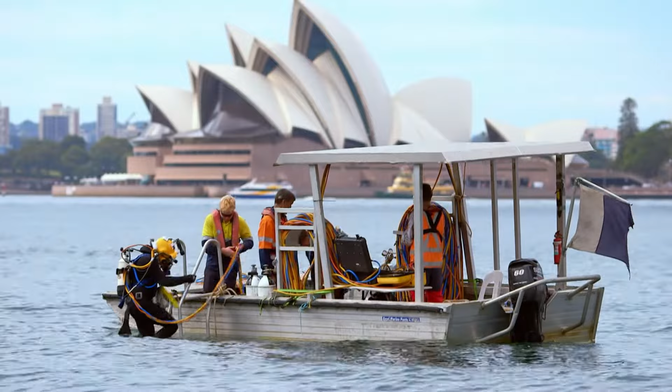No one has ever embarked on the scale of what we're doing here.

In Australia, engineers are taking on an extreme challenge: trying to clear suffocating traffic congestion by building an immense state-of-the-art metro through the heart of Sydney. We have to get there, there's no other way.

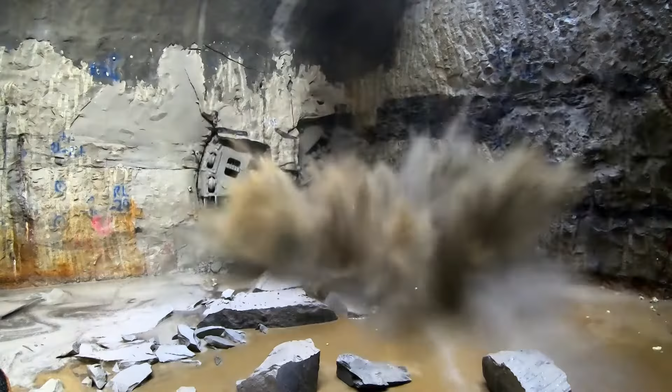The stakes are high. You've got to take every bit of luck you can get in this game. This is, by far and away, the biggest public transport project in Australia's history. If I'm honest, I probably didn't quite know what I was getting myself into.

Sydney, one of the most recognisable cities in the world. It's got the Opera House, the Harbour Bridge, Bondi Beach, and traffic. Endless traffic. But that's about to change. Now a crack team from around the world is tackling the problem head-on, battling to build a world-class metro without bringing the city to a standstill.

They've come from the UK. Mega projects gets thrown around like confetti, but what makes us different is just layers and layers and layers of mega. It should just fit together like a really nice Meccano project.

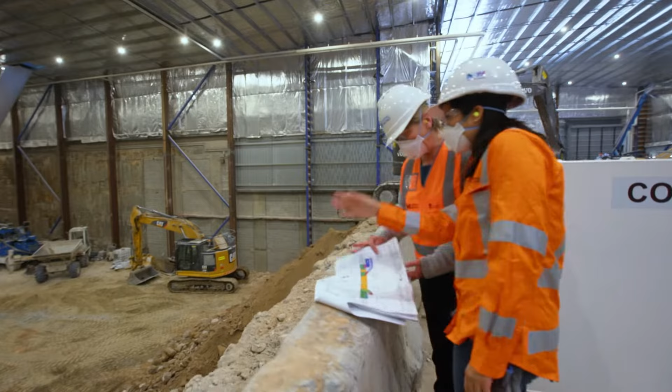From the US: I'm here to dig tunnels. I'm here to do stations, excavations, you name it. I love it.

From France: the design for Sydney Metro is unique, a very creative design, only for Sydney.

From Germany: when we are tunneling under Sydney Harbour, there are no second chances. And from Italy: it's the future of mobility for this city.

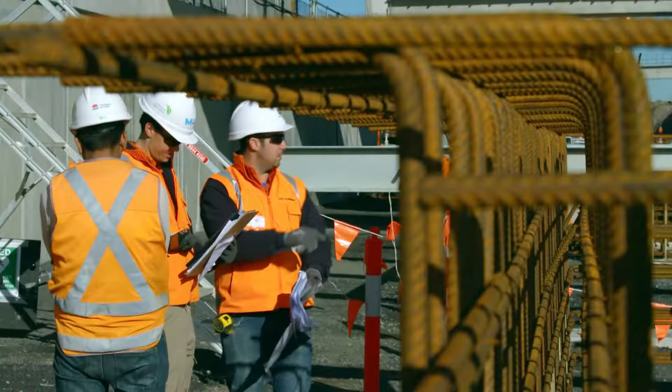40,000 people will build this metro, most of them Australian. It's definitely the biggest role and responsibility I've had. I'm loving it. I've personally developed and grown working on this project, and I think the whole team has. It is interesting—not very often you get to dig a big hole right in the middle of Sydney.

The hole James Pearce needs to dig is in the toughest location imaginable: right in the middle of Central Station, the busiest rail hub in the entire country. 99.5% of Sydney trains travel through this station every single day, so it's a huge undertaking.

We've got 4 pedestrian tunnels through the middle of the station box, and 3 of them we need to keep open at all times, 24 hours a day, 7 days a week, 365 days a year. The station doesn't shut down at all.

James has to remove more than 500,000 tonnes of earth—6,000 tonnes a week—without disturbing Central's almost 2 million weekly passengers. It's a highly complex task, but James is up for the challenge.

So here we are right in the middle. These platforms all need to go to let us dig 30 metres down into the ground and connect into the new tunnels, which will be the Metro trackway. So all these platforms, time to go. Pigeons out, we're coming in.

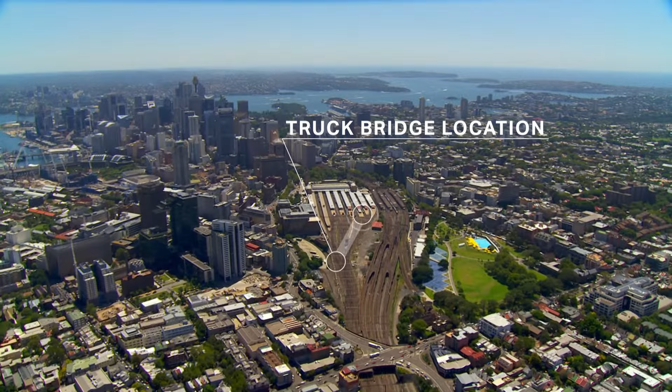His solution is simple: if you can't go around the passengers, go over them with a truck bridge. There's no access the whole way around Central Station, and there's 230,000 cubic metres of material to come out. Every single truck movement for the project will be in and out over that bridge.

One way in, one way out, right in front of the tower crane. The largest beam is 55 metres long.

James is only allowed to disrupt train services for 12 hours, so they're bringing in a prefabricated bridge—400 tonnes of it. That's fully sealed, so then you can drop the concrete in. It will be a race against time to crane in the gigantic steel spans.

Right next door, lines will remain active, with 1,500 deadly volts that must be avoided. Abutment B is extremely close to the live rail. James backs himself and his team to get the job done before the Monday peak arrives.

It's going to be a totally different scene on Monday morning. There's going to be a whole heap of steel across here, and the trains will travel under the bridge for the first time. Digging up the middle of Central Station is just one of the many enormous challenges that confronts the team.

From here, one line needs to run north through a minefield of subterranean obstacles deep under the city, under the harbour, and 50 kilometres out to the northwest. Running south from Central Station, another line will swing 20 kilometres out to the southwest. Next, another line will leave the city and travel 25 kilometres due west to Parramatta. Yet another metro line will then connect a new international airport with the rest of the city, and further still, more lines will create a virtual metro loop around Sydney.

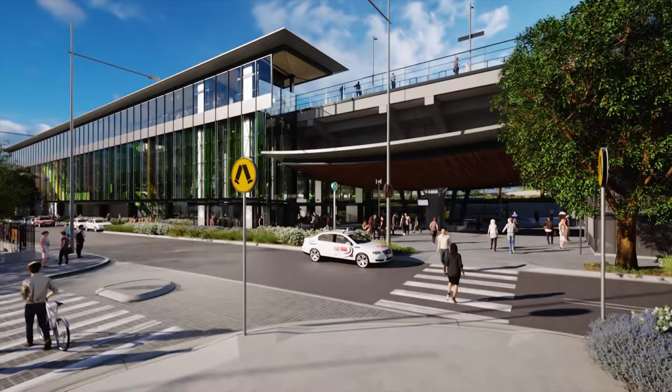More than 50 new or renovated stations need to be built, linked by the longest railway tunnels ever dug in Australia. This project is exceptionally ambitious, and it all needs to be constructed in just a few short years. At every turn, new complex dilemmas await.

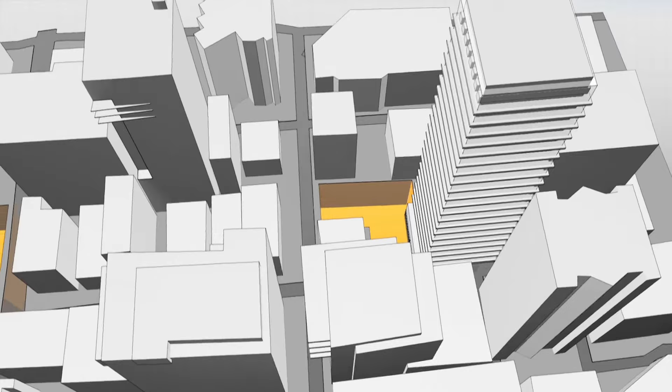One such dilemma looms at a new station site right in the city called Pitt Street. Bobby Saying is in charge of excavating this station. He has to carve out two giant holes between the skyscrapers. No easy feat considering the cramped inner city location.

Bobby's mission is to demolish, then dig. There's a total of 12 buildings we're demolishing. There's a 14-storey building here, there's a pub in the corner, a number of 1 to 3-storey buildings around the rest of the site. There's also another 4 buildings at Pitt Street South.

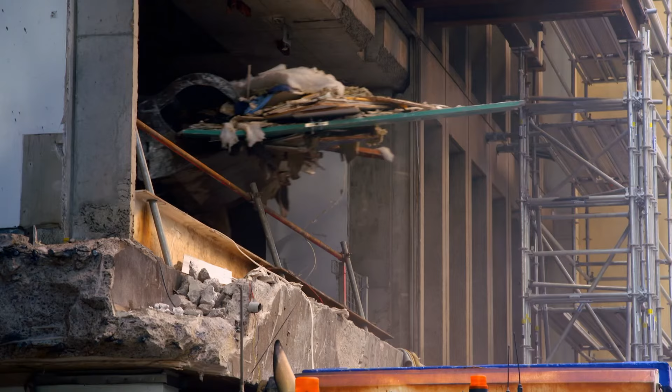The access on the streets surrounding the site is very limited. The hard part is actually getting that first bit of access so you can drive trucks in, load them, and then they go out. That's correct, yeah.

12 buildings bite the dust, but one must stay. It's 41 stories high and towers over one of the massive holes Bobby needs to dig. 76,000 tons of earth must be extracted right next to the building's foundations. If anything goes wrong, it could be a disaster.

We're about to dig down a really big hole right next to a 41-storey building. There's a risk that because that building relies on this ground for support, as we excavate, it will cause movement.

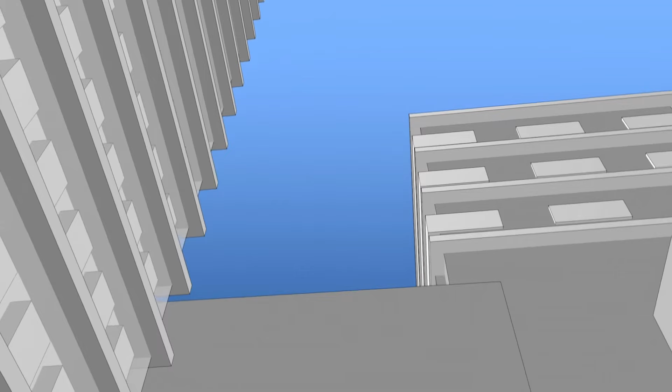It's no ordinary dig. As Bobby's team descends in the skyscraper's shadow, they must shore it up from below with reinforced concrete walls up to half a metre thick. They'll work slowly but surely, inch by inch, to build a concrete rampart.

We can't take away the entire shaft material and then install the wall. We have to progressively do it as we come down. Otherwise, there is a risk of movement of this 41-storey building.

To make matters worse, Bobby's work sites are surrounded by bustling buildings and businesses. They all need to keep functioning while he demolishes other buildings and then digs his super-sized holes right next door.

This is fire station number 1 in Sydney CBD. Our site is located on the back face of this building, the busiest fire brigade in the Southern Hemisphere. We need to ensure that we don't block their driveways, that we're clean and clear around their site. They operate 24 hours a day, and therefore they have sleeping quarters there as well. So we need to make sure that during the sleeping times we're not creating a lot of noise.

On the other side, there's a pub. It's also heritage listed, so a good reason not to demolish it, but it is a beautiful building, and I'm told it has a great beer. There are places people want to enjoy a quiet drink, and places where people need to sleep.

This is a hotel, and so you have guests, and you need to keep them happy. And also, it's in our interest to keep our neighbors happy, because we have to work with them for years on end. Fernandez shares responsibility with Bobby for trying to get this station done.

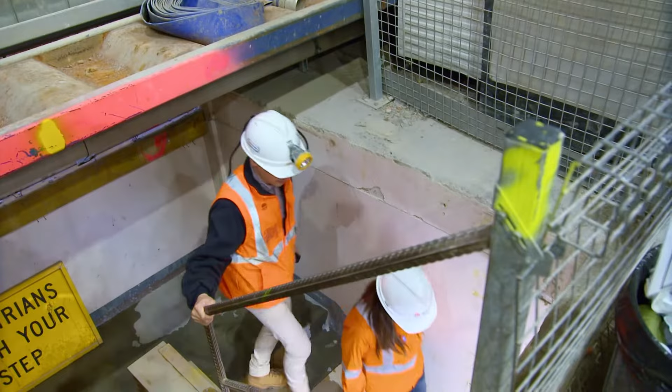This job is hard, but Gloria has the right spirit to overcome all setbacks. As a project engineer, you look after everything, and that's what I love about being in construction. I love project management, being across safety, engineering, design, quality, delivery, what have you, and that's why I'm here in this amazing project and in this amazing industry.

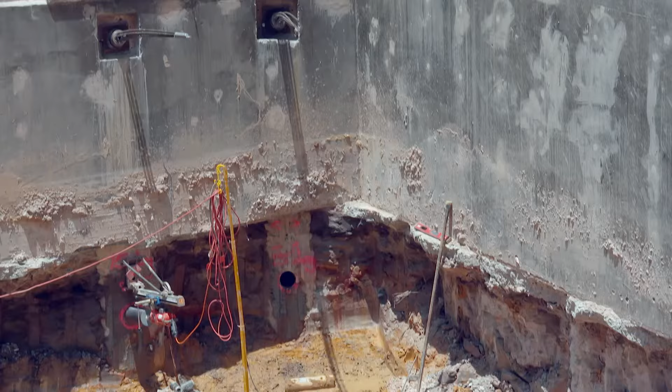With a site cleared, it's time to start digging. It's been going great. We're about 4 meters deep at the moment, and it's a total of 20 meters deep once we're done. His main concern remains the 41-story building towering right over the hole.

As we excavate the shaft and we expose what is left there adjacent to the building, it's something that we have to look at, assess, get our designers involved to ensure that what is there matches what their assumptions were, and so far so good.

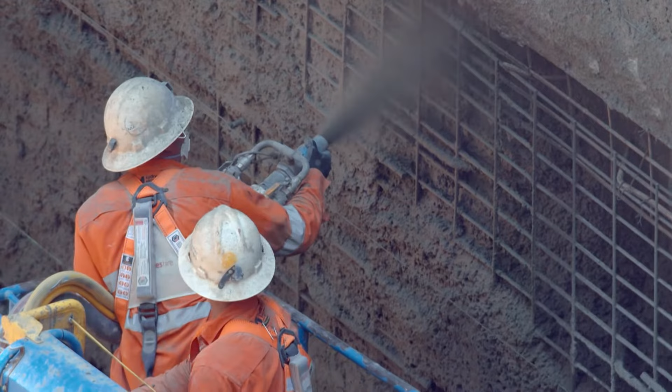So can Bobby be sure the skyscraper next door won't begin to lean in over his hole? I'm very confident, and I'm very hopeful, but I'm very confident that everything will be under control and we won't end up with the Tower of Pisa.

The vision for Sydney's new metro is breathtakingly bold and far-reaching. This is the man responsible for it, engineer and transport chief Rod Staples. He is both proud and often overawed by what he has set in motion.

No one has ever embarked on the scale of what we're doing here. This is, by far and away, the biggest public transport project in Australia's history. If I'm honest, I probably didn't quite know what I was getting myself into at the start. When it goes wrong, where do I go to blame someone? I go and lock myself in a room and have a good hard chat to myself.

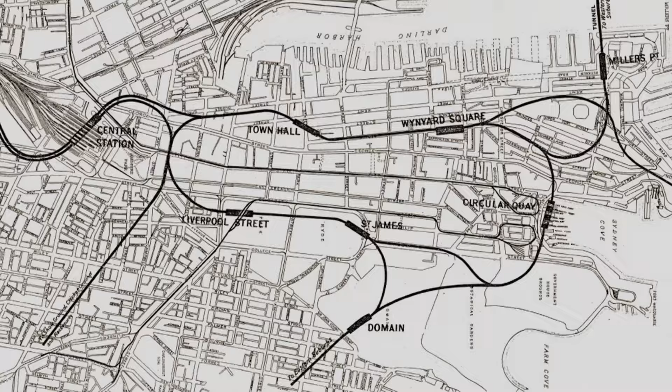Rod is actually not the first person to have championed a Sydney metro. Remarkably, the idea was originally suggested more than 100 years ago, the brainchild of engineer John Bradfield. In 1915, Bradfield submitted a grand plan to government to revolutionise Sydney's transport infrastructure. Bradfield wanted to build a bridge across the harbour, electrify the trains, and create an integrated, efficient railway system, much of it underground, just as was being done in London, New York, and Paris.

The First World War intervened, and Bradfield's plan was shelved. After the war, Parliament approved the plans for the Sydney Harbour Bridge, and the building of that John Bradfield icon began. By 1926, work had started on Bradfield's other vision for a Sydney metro. Some new underground city stations were built, but then work stalled.

Beneath Sydney are almost 1.5 kilometres of unfinished platforms and train tunnels, the incomplete remnants of Bradfield's metro. During the Second World War, the tunnels did prove useful as bomb shelters. These walls weren't here originally, they were put in for the air raid shelter, not for the railway.

The original vision for these tunnels, however, almost did become a reality. This platform was completed nearly 100 years ago, even to the point where the tiling's in and some of the signage is up, but it has never, ever seen a train run through it.

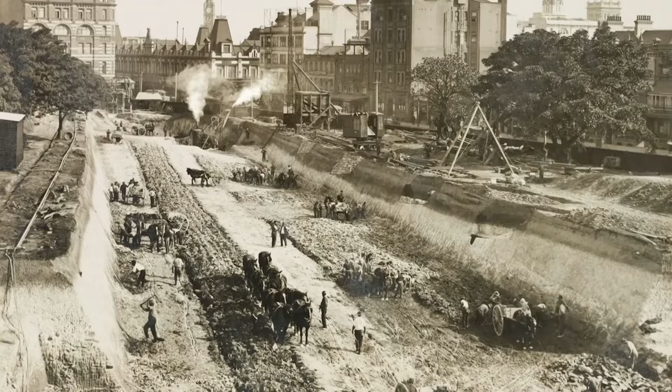If you took yourself back to the 1920s in Sydney, it was an unprecedented amount of construction going on. People believed in Bradfield's vision and they were getting on with it. We get to the end of that decade, the bridge is finished, a bit of the plan for the railway is finished, and then the Depression hits. The money's not there. And then before we know it, World War II, and that's it, game over. The focus really turned to other things.

Fast forward to the 1950s, the car becomes a thing that everyone wants, and so the desire, the appetite to finish that plan disappeared. I just think to myself, wow, what a lost opportunity for Sydney. That really just drives me to say, well, let's go back and finish the job that he started.

Rod is on a mission. He is determined to realise what Bradfield could not. Rod's biggest problem was convincing his boss that a driverless metro was the best way forward for Sydney's future, after she had promised the community a more traditional railway. That kind of shook me a little, and some bits of it were confronting, like driverless trains. Was this the right way to go? Is it the way of the future? Rod was convinced metro was the way of the future.

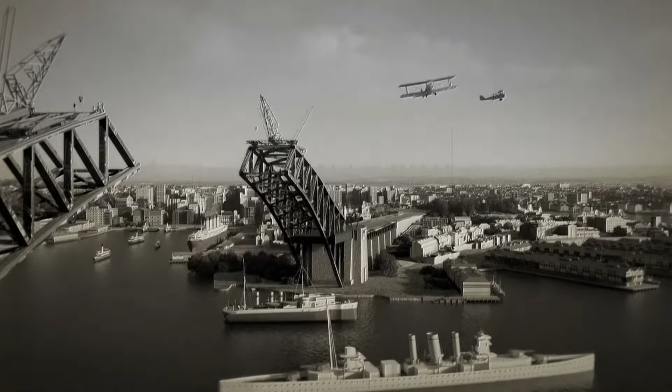Convincing others was harder. Transport officials, including Rod, said to me, 'We don't think it's sensible building the same old kind of rail line. You've got to go for a metro.' The challenge for Rod and the team was set, but what confronts them is a city that has changed radically in the last 100 years. In Bradfield's time, the population was 800,000. It's now more than 5 million.

The digging of Sydney's first train tunnels was a painstakingly slow and laborious task. Some were dug in the more traditional way, using drills, dynamite, picks and shovels. Holes were dug, walls built, and the whole thing covered over.

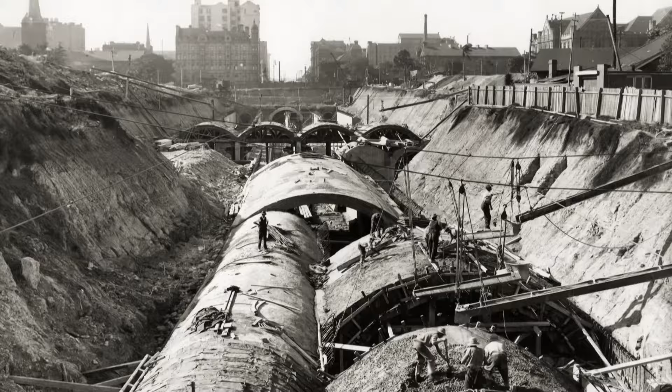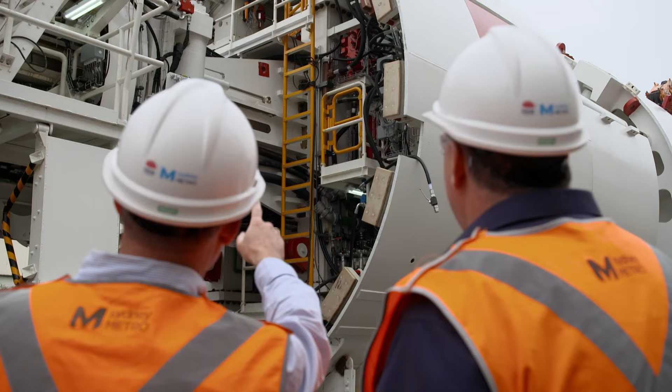Today, train tunnelling is a very different affair. Meet an extraordinary invention, the tunnel boring machine, a TBM. Sydney has ordered 9 of these. A factory in Guangzhou has just about completed the first ones for central Sydney. These mechanical beasts were designed in France and Germany.

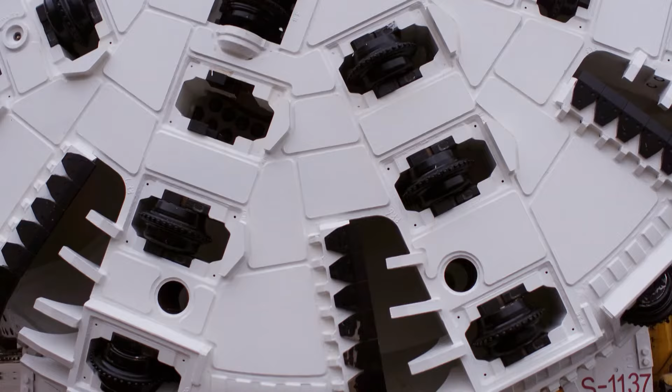TBMs are gargantuan, intricate machines. Each one will take 6 weeks to build. When assembled, they weigh more than 900 tons. A single TBM can cost more than $15 million and can cost $1 million a day to run. One stretches more than 150 meters end to end. This is the very front of it, the cutter head, a wheel of steel more than 3 stories high, slowly rotating, pushed by powerful hydraulics, which will crush and grind the rock ahead of it.

Openings in the cutter head let the crushed rock enter the machine. Conveyor belts then transport the spoil back all along the machine, out through the tunnel.

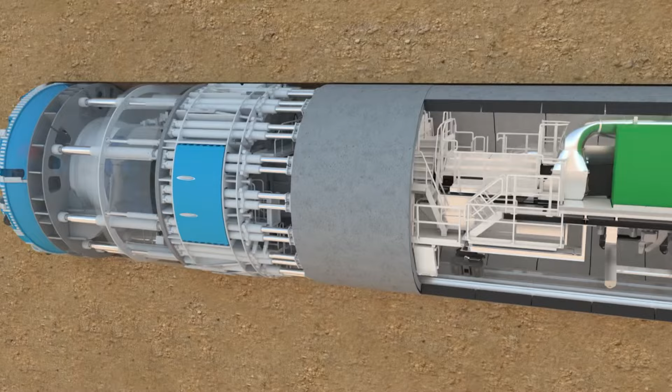Coming up the tunnel, concrete segments. A robotic arm picks them up and places them against the rock walls, six at a time. It creates a ring of concrete, then does it all again and again. As it inches forward like a giant mechanical worm, it leaves behind it a fully formed, completed tunnel.

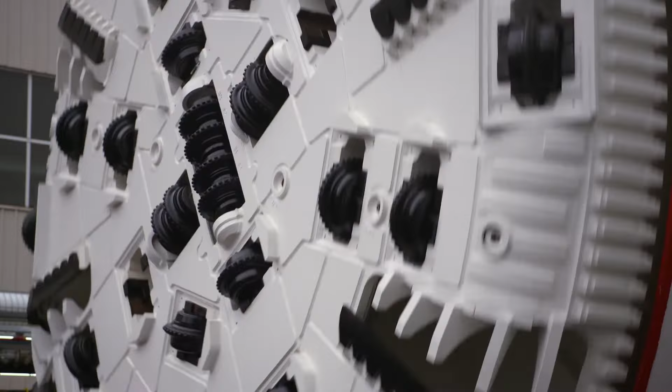It's time to test that this one works. The machine is fired up and turned up to high. Overseeing four weeks of tests is Martin Bell. This is just really proving that the machine's finished. The machine will do what we've asked.

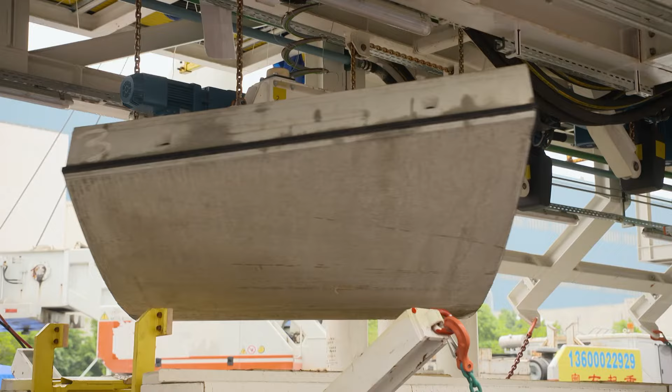It's really designed to simulate excavating the machine without actually excavating, if you like. So we're doing a trial run of all the functionality. It's basically a mobile factory at the end of the day. Once the machine's built and running, then everything's like a sausage factory, is the way it's described.

Like a performance car, this TBM has been modified to help it go faster. We've introduced TCI cutters to the cutting head, so they're a button cutter. Those cutters allow us to cut a lot further. They're better suited to the sandstone conditions and minimise the amount of cutter changes we need to do.

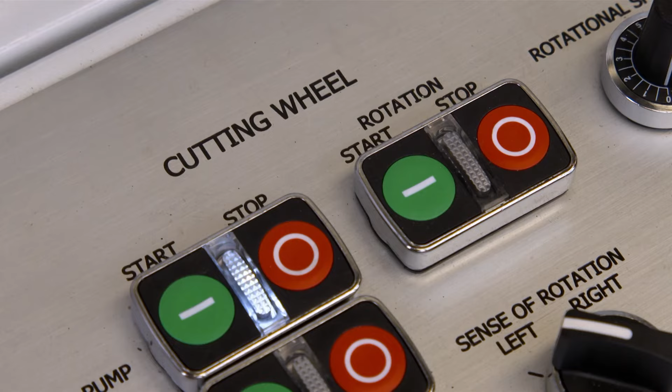So, does it meet the specs? Did this TBM pass the test? It's a high quality piece of equipment. I'm excited. I can't wait to put it together and put it in the ground. That's really what it's all about.

And now it's the nervousness of putting it on the water and hoping that it gets off the water and gets to site. But yeah, it's a pretty proud moment. It's like being a father, I suppose. That's one down and on its way.

Back at Central Station, the clock is ticking. James Pearce and his team are in a race against time to crane in the giant steel girders of the truss bridge. He needs to get them in and balanced above the tracks before train services resume beneath.

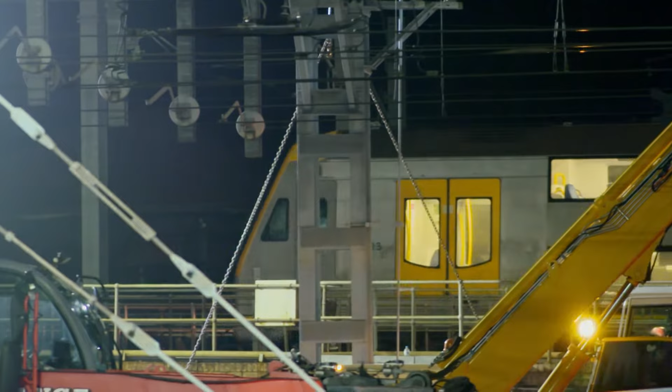All around him, other trains keep running. So the suburban lines are continuing to operate this weekend. The intercity lines are shut down for the possession to lift in the major steel trusses over the live rail. We've got 48 hours between Saturday morning and late Sunday night to do all of our work and hand back the rail for Monday morning to open for the customers.

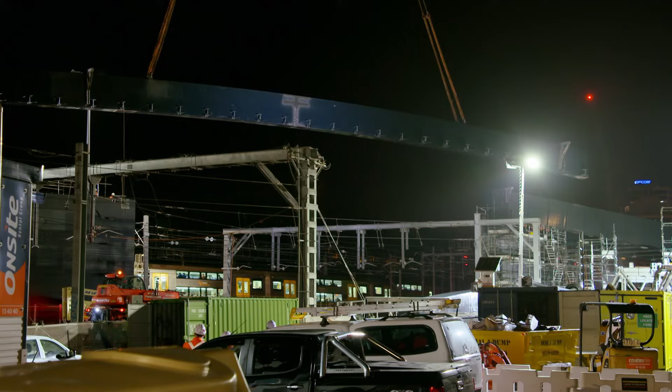There are 8 huge pieces of steel that need to be craned into place, and maneuvering them is very dangerous. 1,500 deadly volts of electricity is running through the nearby wires.

This steel girder weighs 55 tons. We're very limited to what we can do. We've had to install the biggest tower crane in the world to come in and lift over live rail so we can lift them in the modules. They're massive pieces of steel.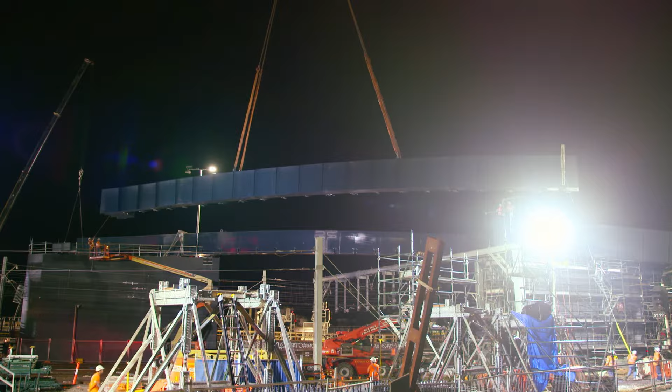This girder is more than 50 metres long, but needs to be placed with millimetre accuracy. They're landed on all of the works which have been constructed previously, so the bridge piers and footings, we drop the steel girders on and bolt it immediately.

One by one, ever so carefully, the giant crane lifts the giant girders into position. There's no room for error. The space is as tight as it's been on any job. Slowly, the truck bridge begins to take shape. Oh, they're doing a great job here. There's one already in, another one to go, so pretty good night shift at this point, and then we come back later and do the decks on top.

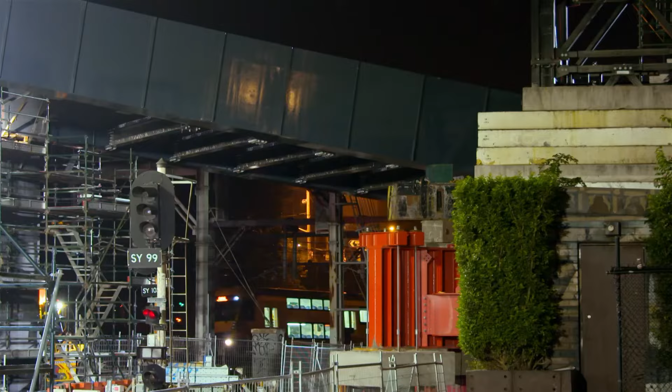Trucks are the backbone of any major excavation. Deep station boxes are being dug all around Sydney, so an extra 1,000 trucks a day have joined the city's traffic snarl. 1,000 trucks in and out of the city, normally with trailers, causing congestion, blocking intersections at traffic lights. It's just not a fun city to drive around anymore like it used to be.

Making sure traffic doesn't grind to a standstill rests on the shoulders of this man, Steve Jones. Even for this ex-British commando, it's a daunting task. It's going to be really, really hard. This is going to be a massive challenge.

This is going to be collaboration on a mega scale. So whether it's the Transport Management Centre that you see behind me, whether it's Sydney Trains, whether it's the ferries, everyone is actually going to have to come together, make sure there's minimum disruption across Sydney while we do it.

Steve is fighting a constant battle to keep traffic moving. In this room are 18 specialists monitoring roads, traffic lights, buses, trains and ferries. Each scrutinises their piece of the transport maze, trying to unravel problems that pop up minute by minute with military precision. In their arsenal, they have access to more than 10,000 CCTV cameras. This state-of-the-art nerve centre is the largest in the Southern Hemisphere.

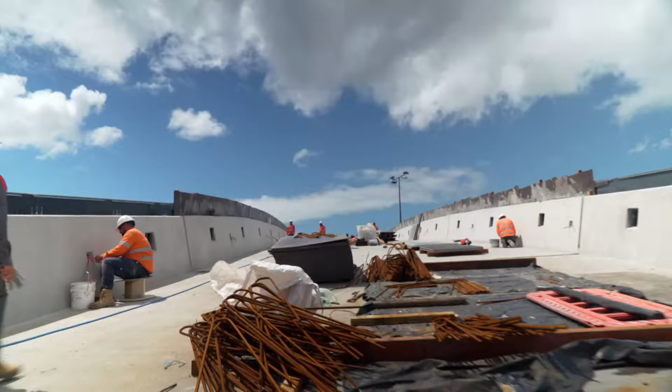Back at Central Station, James Pearce is in a battle of his own, again racing the clock. Until his truck bridge is up and running, he can't dig down, can't get anything in or out. Once the bridge is finished, it'll be full steam ahead, with fully laden trucks passing right over the heads of train passengers, through Australia's busiest station.

So the guys have done a great effort getting the steel in. Next step, concrete. There's a thick deck to go in here, which will enable the truck bridge to carry fully loaded trucks, both in with materials and out with spoil for the main Central Station works.

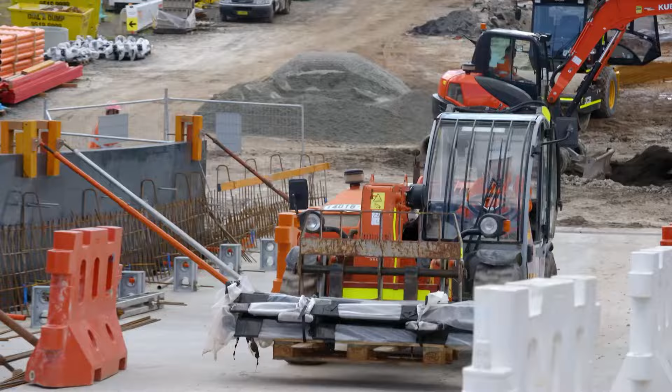For James, there's one ultimate nightmare scenario: a truck crashing over the bridge and ending up on the live rail. Probably not what we want for this job in the middle of Central Station. A truck plummeting over the side would spell catastrophe, so the bridge has to be reinforced to withstand immense impacts, with big, thick concrete barriers up the side providing protection for all vehicles in and out. With the barriers completed, James's battle with the truck bridge has nearly been won.

Around 35 kilometres from the city of Sydney is an area known as the Hills District. To build the metro out here, engineers face an entirely different set of challenges than in the city centre. Here, the issue isn't how to connect into an existing station, but where to put the new metro stations. Beneath these hills, Rod's team will dig the two longest rail tunnels ever dug in Australia.

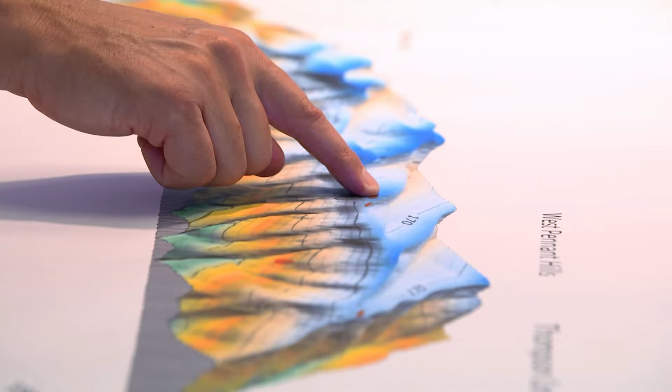The length isn't the problem, the hills are the problem. This big climb up and then being able to stay far enough north to get to Castle Hill was a big key part of the alignment planning. Whenever you're locating a station, it's a real fine balancing act between the absolute best customer outcome and what the engineers feel they can deliver in terms of the depth of the station, the terrain, and the ground conditions and geology underneath.

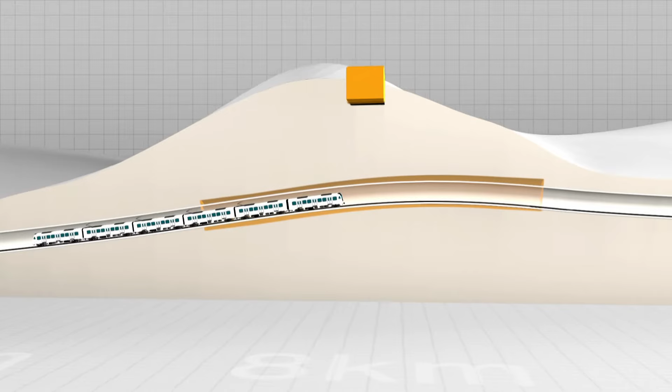The steepest gradient these trains can climb is about a 4.5% incline up or down. So the problem is, in hilly country, a station cannot just be positioned anywhere. If a station was placed near the top of a hill, for the train to get there, the platforms would need to be very deep underground. That's not a good result for customers. You just want to be on the train.

You don't want to be spending 5 minutes getting from the surface down to the train. So the shallower we could make the stations, the more attractive it would be. The deepest station in Sydney is about 35 metres, and customers find it frustrating.

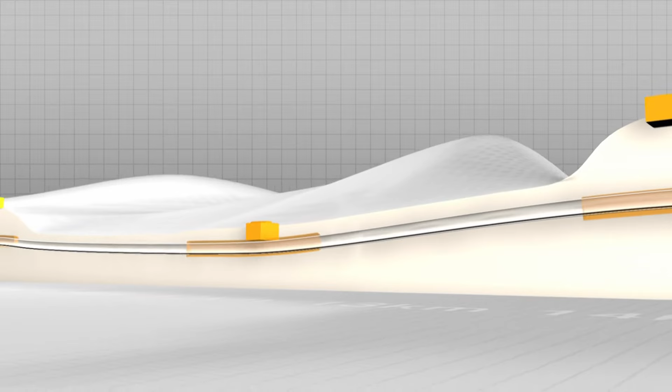So for Rod and his designers, finding the right route and placement of stations is a careful balancing act. They have to ensure the depth of each station and the maximum incline trains will travel to reach them is achievable. Where to put the route and where to put the stations was a massive challenge, not just from an engineering point of view, but from a whole community point of view as well.

In this area, Rod has had to carefully manage community expectations. Rail has long been promised here, but never delivered. People were crying out for it. There'd been decades of debate and argument about building this railway. And when I first stepped out there, I think a lot of people intuitively believed that, yes, this would help. But no one actually believed that it would happen.

Rod is making it happen. For him, there's no other option. This area of Sydney has the highest level of car ownership in all of Australia. Here, triple car garages are the norm. A metro here should eliminate 14 million car trips every year. People just need to leave their cars in the garage and instead travel beneath the hills and far away.

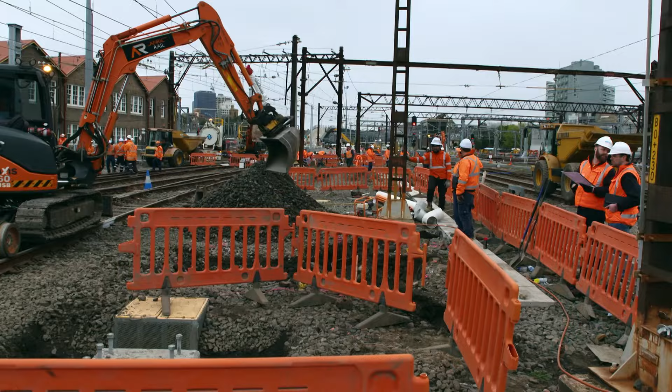Back at Central Station, at last the truck bridge is up and running. But James's real work is only just beginning. It's demolition time. Now 3 railway lines have to be dug up. And again, they've only got 48 hours to get the job done.

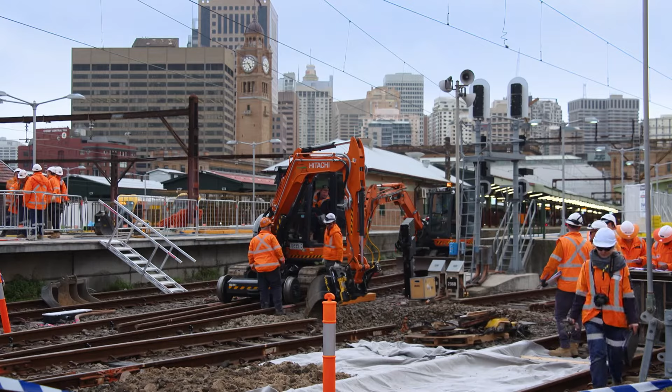From 2 a.m. Saturday to 2 a.m. Monday. To allow us to build the Metro box, we need to remove 3 tracks, 13, 14 and 15. Again, James is racing the clock. It's a critical point with limited time. We get a 48-hour window, we'll turn off the power, relocate all the wires, and then we put it back in, turn the power on for commuters on Monday morning.

As darkness descends, the rail gang gets into top gear. James first needs to remove the old tracks and then lay new ones and new overhead power lines that will divert trains away from the platforms to be demolished. 48 hours, that's it. We don't have any more time and we need to get the tracks open for the customers on Monday morning. The clock is ticking and the team are pressed for time.

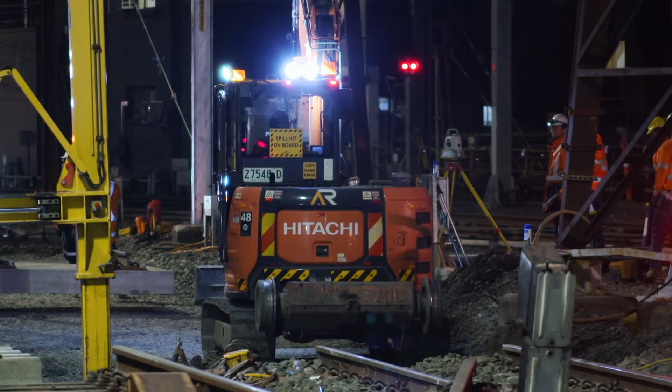But they can't jeopardize safety. There are 200 people working here, surrounded by moving double-decker trains and live power lines. Some are just 4 meters away. We're dealing with live rail, we're dealing with buried services and signal cables, we're dealing with turning the overhead wire back on and the reinstatement of it. It's a huge piece of work compressed into 48 hours.

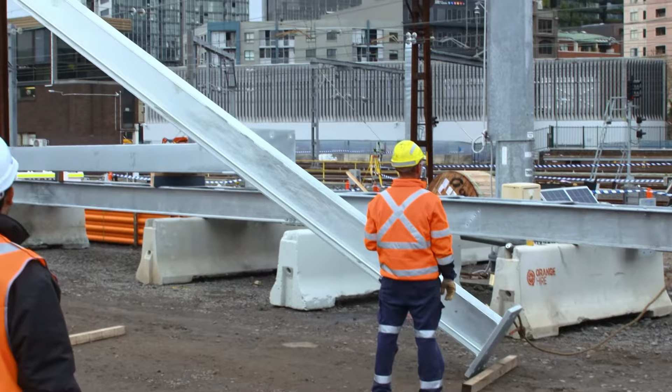As Saturday ticks over into Sunday, there's still an enormous amount of work to do. Soon there's only 22 hours to go. Time is rushing by. Moving the overhead lines is one thing that can't be rushed. All the surrounding lines are still active. 1,500 volts courses through each of them.

We actually need to relocate the track and the overhead wiring. So all of the guys here are working together to do it safely, but we do need to recognise live power on both sides, very specific controls on both the cranes, excavators, and with all the people doing the work.

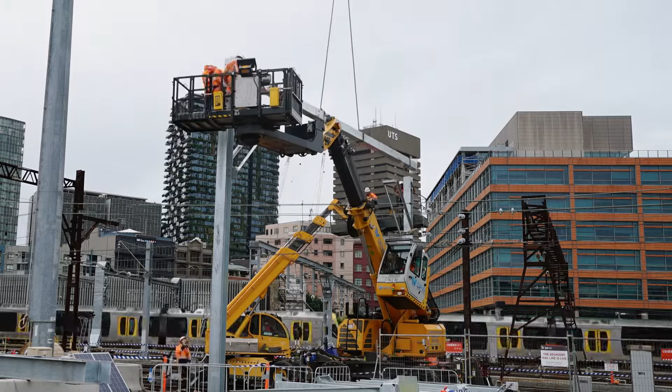Finally, the old track is gone, and as night descends again, time is running out. The pressure is building. If they don't finish in time, there will be nowhere for trains relying on these 3 lines to go. Monday peak hour will be chaos.

Then a strange-looking machine is brought in to speed things up. It's called the crab walker, and it's obvious why. To save time, the new track is prefabricated off-site, and the crab walker lifts it carefully into place in large pieces. The crab machine or the PEMLEM comes in and speeds it up rather than laying every sleeper by sleeper.

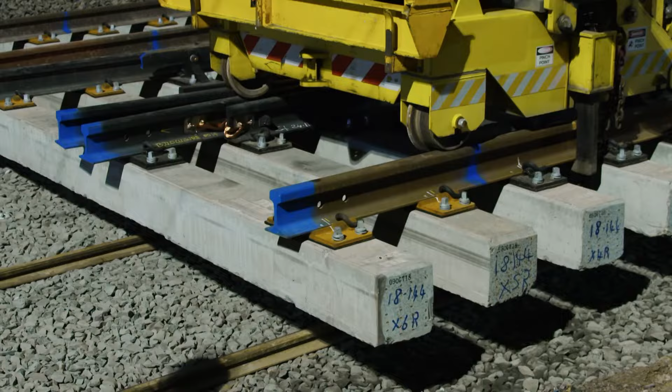The new section of track gets picked up outside the alignment, the crab walks it across, drops it into place, and then we tie it in and reinstate the ballast, tie the track in, open it up and away we go. We've got about 2 hours to go, everything's on track, no pun intended, should be right. And the trains will be in a few hours, back for Monday morning peak hour. They make it with 2 hours to spare.

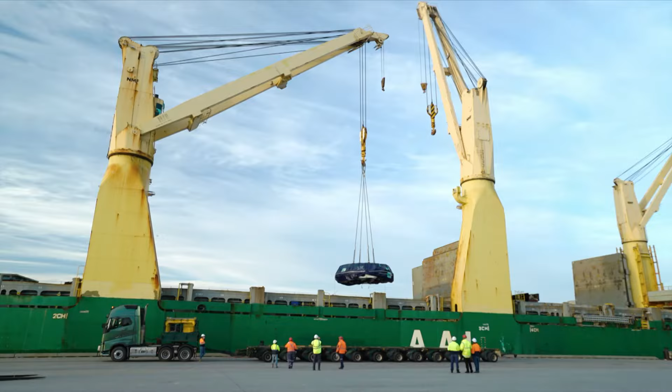About 160 kilometres from Sydney is the port city of Newcastle. It receives thousands of trade shipments from around the world every year, and now the gigantic TBM components are starting to arrive. Some of the modules of these monster machines are extremely large. The cutter head alone weighs over 100 tons, and this shield weighs over 200 tons.

After the 8 separate hard rock TBMs are offloaded in Newcastle, these huge pieces of machinery will be transported by road to 4 different launching sites around Sydney. This part of the delivery has been months in the planning, but will need to be executed precisely to succeed.

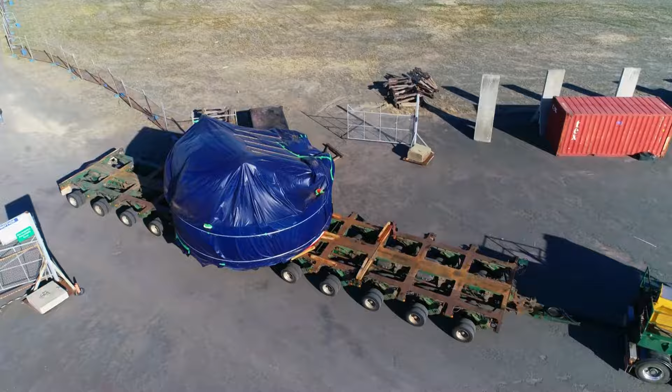The first 2 TBMs travel to a site in Bella Vista. The next 2 will be launched at Cherrybrook. 2 more will travel to Chatswood, and the other 2 to the inner city suburb of Marrickville. The best way to achieve this is with a convoy of trucks. Like a military operation conducted under the cover of darkness, the convoy sets off. 1 TBM equals 900 tons of gear, which equals 23 trucks.

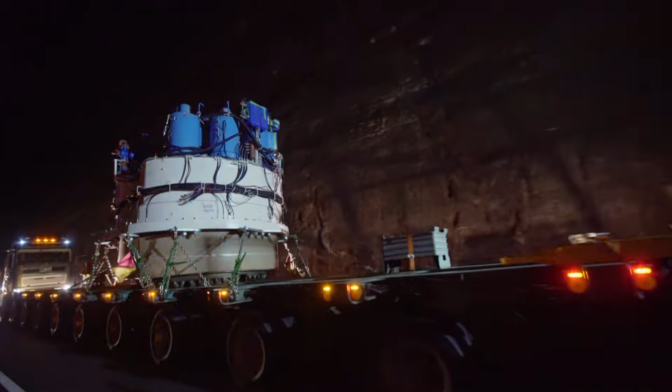Along the route, police and emergency vehicles clear the roads ahead. The route has been carefully mapped out to avoid weaker bridges that could be severely damaged by such heavy machinery, and those that are too low for the trucks to fit under. Some are cleared with little to spare.

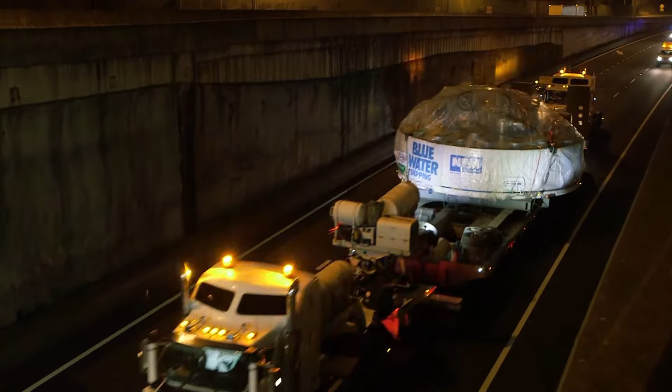The further into the Sydney suburbs they get, the harder it gets. Again, time is running out. With rush hour just a few hours away, the convoy is under increasing pressure. As the streets narrow, every metre is hard won. There's danger on all sides, but safety is paramount. Power lines have to be lifted by workers, parked cars dodged. It's an obstacle course. One wrong move and the whole convoy could come to a grinding halt.

Luckily, these are no ordinary trucks. This rig has 132 tyres. To navigate some of the tighter turns, another prime mover needs to steer the trailer from behind. The drivers behind the wheel are highly skilled specialists with nerves of steel.

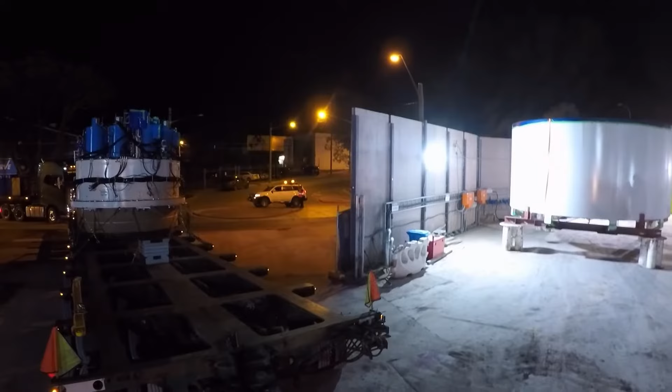The convoys reach their destination just before peak hour. All the components are offloaded. Now they work around the clock to get the machines up and running so the all-important tunnelling can get underway.

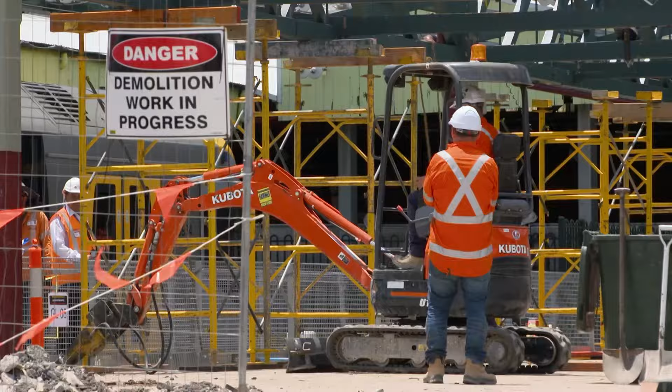Back at Central Station, all train services are back to normal. Australia's busiest station is again running at full steam. In the middle of it all, James faces his next challenge: removing 3 train platforms. They're in the way of the cavernous station box he needs to dig. The problem is, parts of the platforms have heritage elements. He can't just bulldoze it all.

So the first thing to go is going to be these timber canopies, beautiful old timber, individually bolted and fully truss frame. Not very often do you get timber like this anymore. All of the signs, all of the clocks and everything in here is heritage and well worth preserving. We'll do our best to look after it.

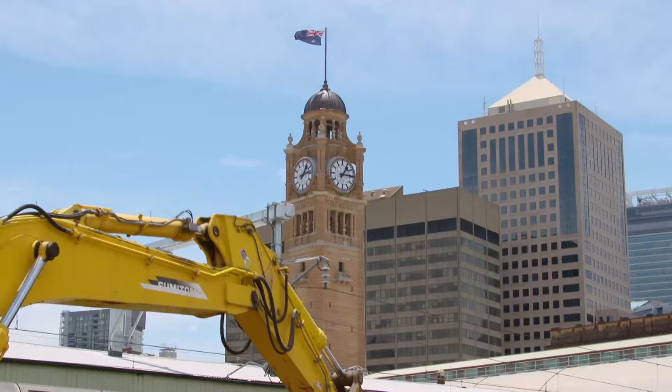Platforms 13, 14 and 15 disappear. Platforms 13 and 14 will later be rebuilt when the new metro has been completed below. But one platform is doomed and will never be seen again. Platform 15 is gone. It'll go 12, 13, 14 and over to 16 on the suburban line.

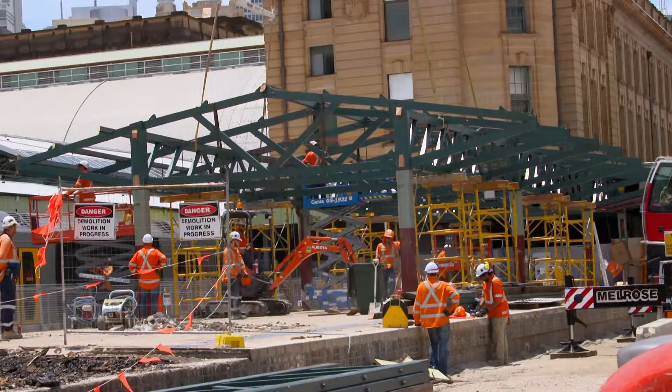With all train services at Central Station now back up to speed, James and his team are again surrounded by live railway lines. From here on, nothing will be switched off to assist him. We've got the intercities live and we've got the suburbans live. So we're working with cranes, excavators and pulling down pretty big buildings as well as demolishing in the middle of the live rail. The railway isn't switched off for what we're doing, and we're doing this all in a very constrained space. As the heritage structures are pulled apart, problem after problem needs to be addressed.

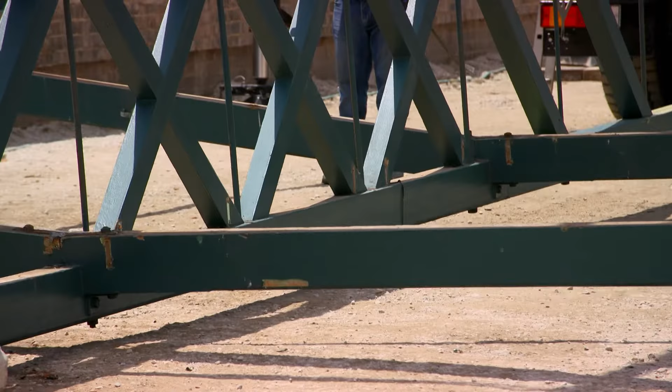There's existing lead dust in there, which has been there from the train brakes over a number of years. There's services throughout them, which we have no idea where they're running. In addition to that, it's a fully bolted truss frame. So we're really undoing 60 to 100 years of history in the turn of a bolt. Soon, this part of Central Station is consigned to history.

Currently, there are only 3 ways to cross the harbour: the bridge, including rail, a road tunnel, and the ferries. The new metro will revolutionize this situation. For the first time in nearly 100 years, Sydney will have another rail crossing of the harbour.

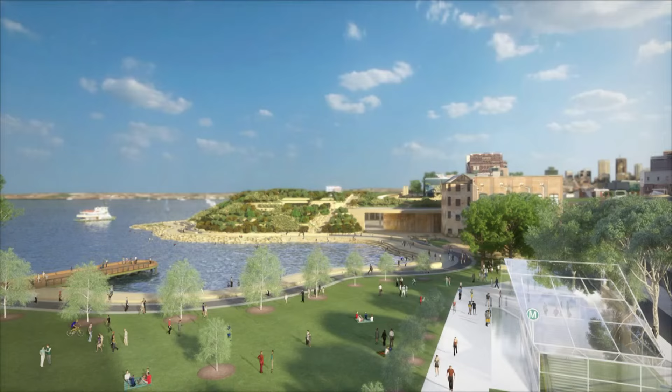2 new rail tunnels will be excavated deep under the harbour and join with a brand new station called Barangaroo. This underground station needs to sit on the very edge of one of the largest and deepest harbours in the world, and all of it will be below sea level. One of those responsible for making this station happen and safe is engineer and design manager Ali Shad.

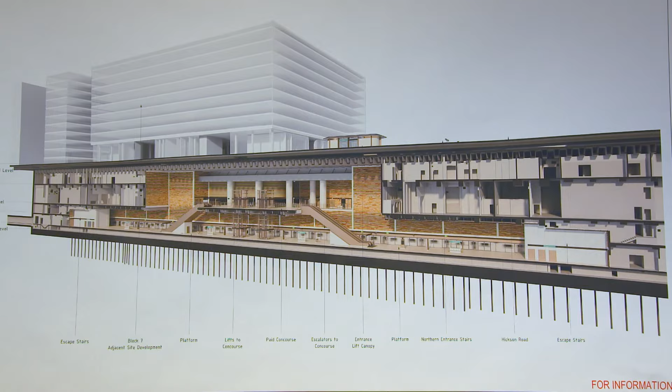So this is our station that we're designing here. It's about 240 metres long and 25 metres below ground, and about 20 metres wide, so it's a really big station. It's basically an iceberg station, a lot bigger below ground than above. All of this is below the water level, so the harbour's just there, and all this is below that. Being below water level right next to the harbour is a major challenge in designing this station.

Ali is well aware of the risks. See this wall here, it kind of just juts out, it kinks out there, and then it kicks out again. We have some unique challenges in regards to the location we're in, but also some brilliant benefits. I mean, we're the only metro station that's going to take passengers right to the harbour front. That's just incredible. To his credit, Ali is determined to see the positives.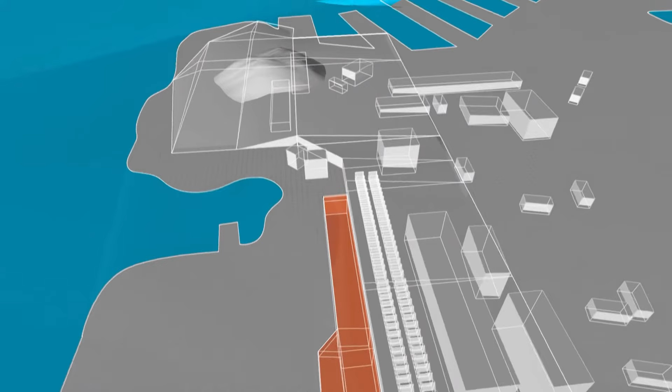But this station's proximity to a huge amount of water is a construction risk. Not just in terms of the water in the harbour, but the water in the ground, seeping in through the rock. The water level is basically above where the station's going to be. The station's going to be in a big hole in the ground at the end of the day. So we've got to design for the groundwater, which is trying to push, in effect, the station out of the ground. Not to be too dramatic, it's not going to float away down the harbour, but the buoyancy effect would cause the station to rise out of the ground.

One solution to this buoyancy problem would be to have a sump, a low point from which all the groundwater seeping in could be pumped out. But Ali and his team have decided they cannot rely on this solution. The problem with draining the station is, close to the harbour, we're just going to be pumping and pumping and pumping for the next 100 years. And also, if there's any nasties in the soil, then you're going to have to deal with them as well.

To make his station completely watertight, Ali plans to wrap the entire immense station box in plastic, without a single gap through which the water will be able to get in. It's known as tanking. But it is rarely attempted this way.

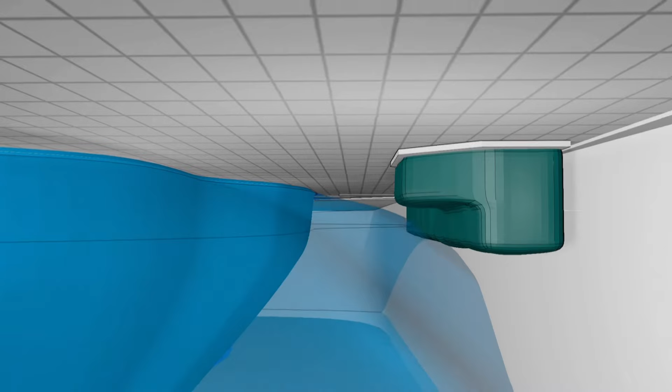And it will magnify another problem. With nowhere else to go, the pressure of the groundwater will build and build. It will eventually begin to push the entire station box out of the ground. Tanking has its benefits, but what it means is we have to lock the station into the ground.

So to do that, we've got all these permanent anchors you can see on the screen here. These are really big anchors, up to 20 metres long. They contain 49 strands, and each strand is about the size of a AA battery. So in effect, each anchor is about 30 centimetres in diameter, 20 metres deep, and that's what helps lock the station into the ground. Ali is placing his faith in the power of steel to hold back the power of water.

To make things even harder, he's not just battling a water problem. His station is very much caught between a rock and a hard place. On one side is the iconic harbour, and on the other side is a considerable wall, and a heritage one at that. This formidable rock face is part of the so-called Hungry Mile, a name bestowed by harbourside workers during the Great Depression. Last century, this place was crowded daily, with hundreds of men walking from wharf to wharf seeking work. If they found it, they put food on the table.

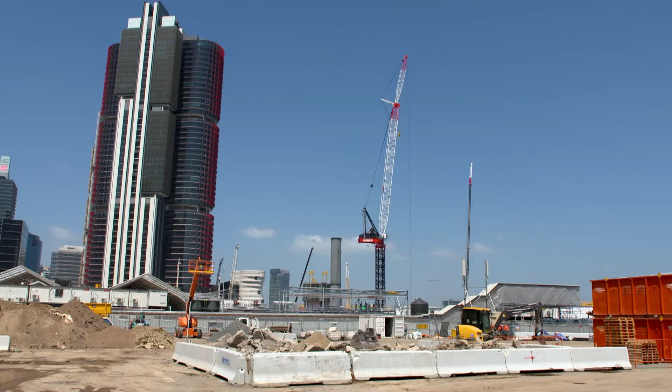If they didn't, they went hungry. So this area's got heaps of cultural and historical significance for us, and we've got to be really careful that we don't impact that negatively in any way. So we really want to make sure this Hungry Mile wall doesn't fall in when we're doing our work. The highest part of the Hungry Mile wall is about 10 metres. The station box needs to be dug right at the foot of this wall, 25 metres straight down. The end result will be a sheer drop of 35 metres.

Needless to say, the team want to be sure the top of the wall is rock solid before they turn this into a high cliff. We want to make sure that the wall's stable - it's already about a 10-metre high wall, and we're going to be excavating another 25 metres down, so it's going to be 35 metres in total. We want to make sure that it's a good, solid, sturdy wall. The geotechnicians get to work, drilling cores deep into the rock face.

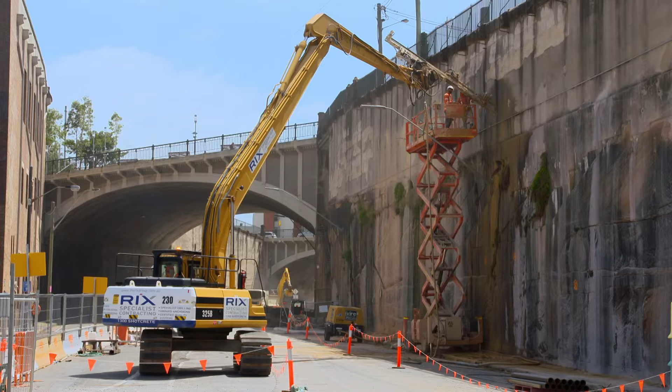They discover the cliff face is definitely not as stable as it should be. They insert rock anchors, which should stabilize and add strength to the wall. It also needs to be covered in mesh, so rocks don't fall on cars passing below.

We've done the analysis and we know exactly what we need to do. So we're going to put in some anchors, some mesh, so we protect the wall and make sure that the cliff face is nice and sturdy.

Digging down can now begin, except for one small impediment. We're planning to build a station directly underneath the operational Hickson Road, but we want to keep traffic running. So what we decided to do was build a temporary bridge deck to move the traffic over onto a bridge, and that allows us to then dig up the road and build the station, excavating completely underneath it.

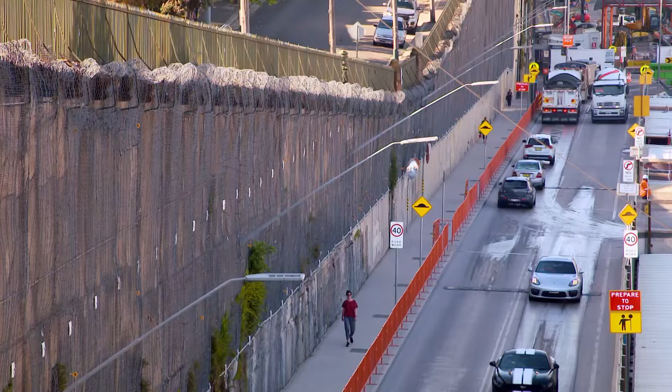The new road takes just 7 weeks to build. Finally, the station box excavation gets underway.

Not long after, work grinds to a halt. Yet another predicament emerges from the mud. But we found the oldest Australian-made boat. It's a pretty impressive find. See where that hole's been dug over there, next to the hull? That's where we got the keel.

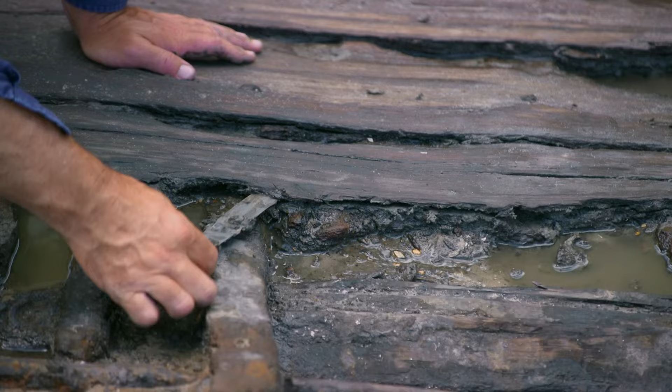Marine archaeologist Cosmos Coroneos is excited by the find. This wreck is the wreck of the earliest known Australian-built ship that we have in Australia. We think it was built around about the 1820s or 30s. It was probably dragged up on what was once a beach sometime in the 1840s and eventually covered over the decades, finally covered over around about the 1890s.

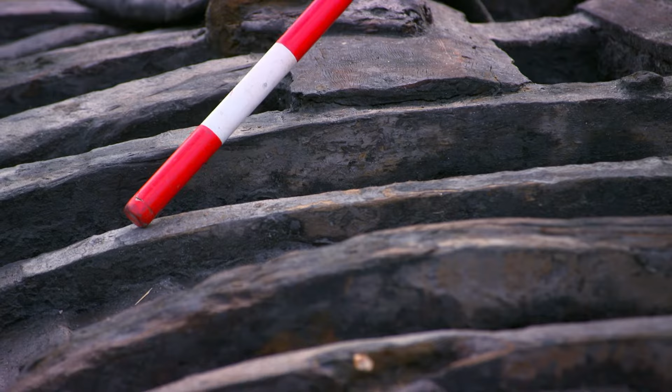Cosmos's work proves the boat was built in Australia based on what it was built from. It's made out of Sydney blue gum, stringy bark and spotted gum, so local timbers. And that's what helped us conclusively say that it's an Australian-built vessel. This is a floor timber. It's one of the strongest timbers they have on the boat, and what they've done is used the natural curve of branches to make that timber. So they were very skilled at what they did with the little that they had.

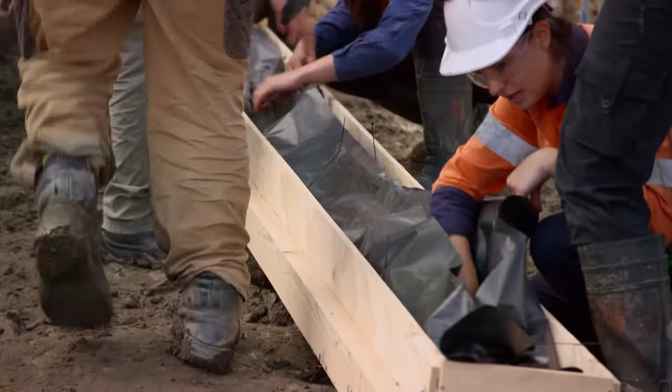Cosmos wants to excavate the entire boat and plans to remove every last piece so he can study this ghost from Sydney's past in detail. We always knew there was a high likelihood of finding something, we just didn't know what. So we plan to work around it, just so it doesn't hinder our progress of the station build. The boat is a wonderful find for archaeology, but risks hindering the Barangaroo team.

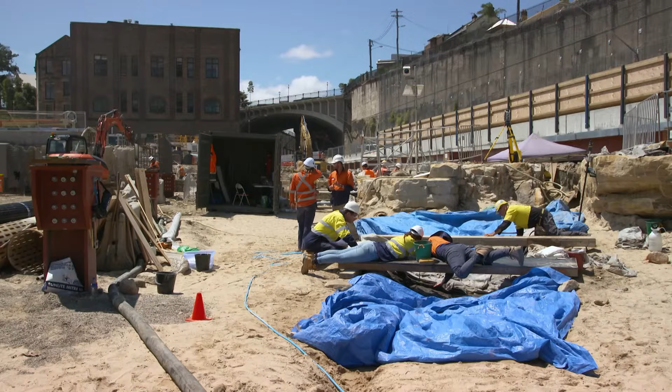Every day the archaeologists work is a day lost excavating the Barangaroo station. Ali puts a brave face on what is for him an unexpected situation. It's a bit of a pain, but it's the right thing to do. The right thing to do, perhaps, but the schedule has just gotten a lot tighter. This historic discovery risks delaying Ali and the team's progress.

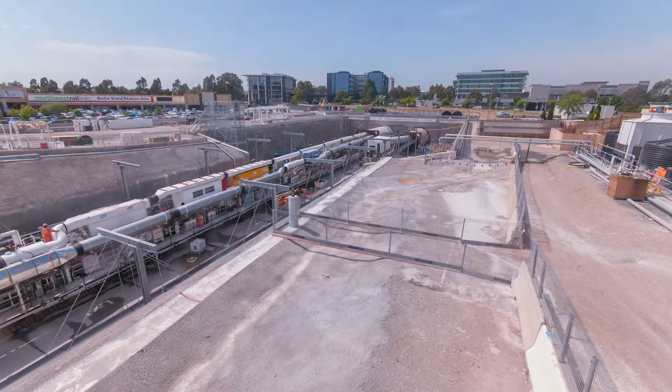Work might have stalled at Barangaroo, but tunnel boring machines wait for no one. Time for action stations. Time to fire up the mechanical monsters and launch the TBMs. The high-risk job of digging 61 kilometers of tunnels is underway through sandstone and shale, and down to 58 meters at their deepest point. Hundreds of tunnelers working around the clock in giant underground mechanical factories where there is danger at every turn.

TBMs are only ever given female names, a long-standing tunneler convention. Working in the underworld, they're a superstitious group. At every dig, there's a statue of Saint Barbara, the patron saint of tunnelers, providing protection. Well, you've got to take every bit of luck you can get, don't you, in this game? It's high-risk construction. We'll take every bit we can get.

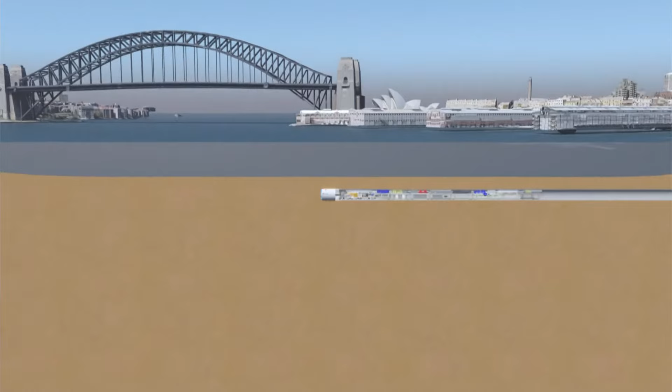The 8 TBMs that have launched will dig almost 60 kilometers of tunnels, but not those under the harbour. The 2 tunnels beneath the harbour are the shortest any of the TBMs will dig. It's less than a kilometre from Barangaroo to the North Shore. It may not be far in distance, but it will be by far the most challenging and most dangerous tunnelling on the entire project. The team is about to discover what really lurks beneath the surface.